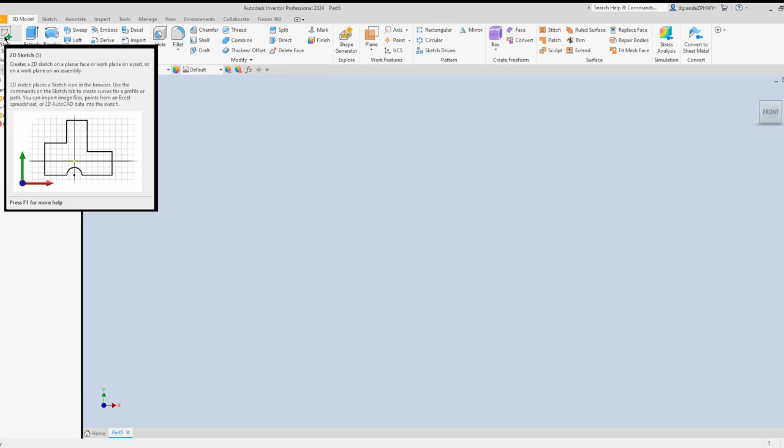So first thing we want to do is go to Tools and Document Settings, Units, and Millimeters, and hit OK. So we're in the metric system.

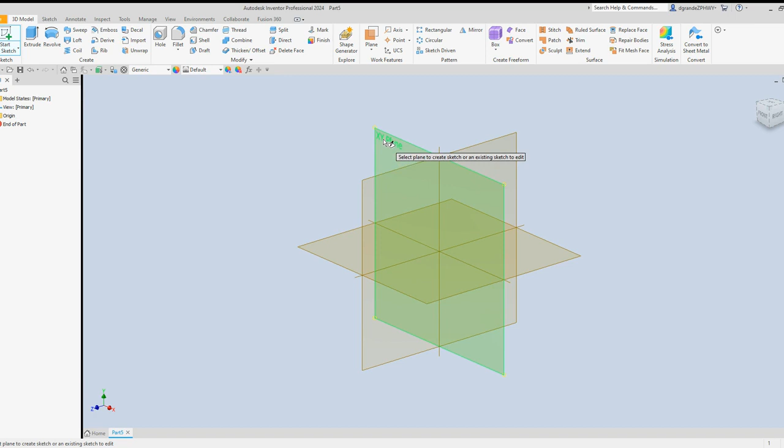Then we're going to go to our 3D model and start a 2D sketch. Now I'm going to go through this kind of quick because I don't want the video to be 90 minutes long. So if you get lost, I'm ahead of you. Just pause the video, go back. Probably best while you're working to have this playing on a Chromebook and off to the side while you're working on your computer at your workstation, if that's the setup you have. If you're one of my students, that is the setup you have.

So we're going to start this sketch on the XY plane. And I'm going to give you dimension numbers as an estimate. I don't want you to type these numbers in because I don't want you to constrain any of these numbers in the sketch. I'm just going to tell you about where they are. And as long as you're close, it should work out just fine.

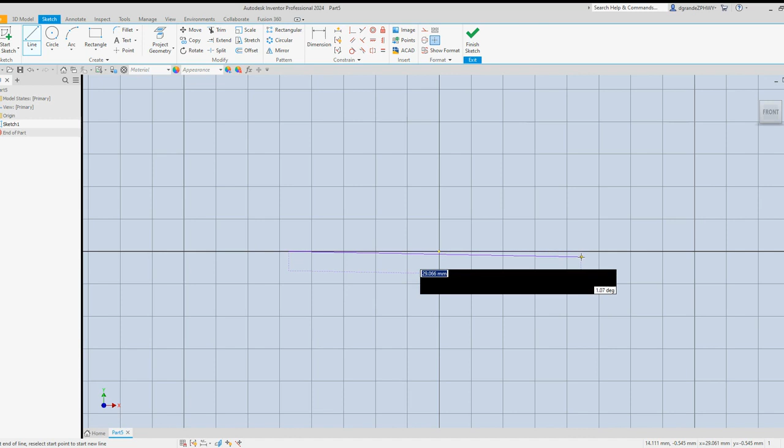So the first thing we're going to do is take the line tool, and we're going to start on the right here at about somewhere around 14, 15 millimeters. I'm at 14,950. And I'm just going to go straight across, about 30 millimeters across here. I think that's about what they were doing, 0 degrees, and hit OK.

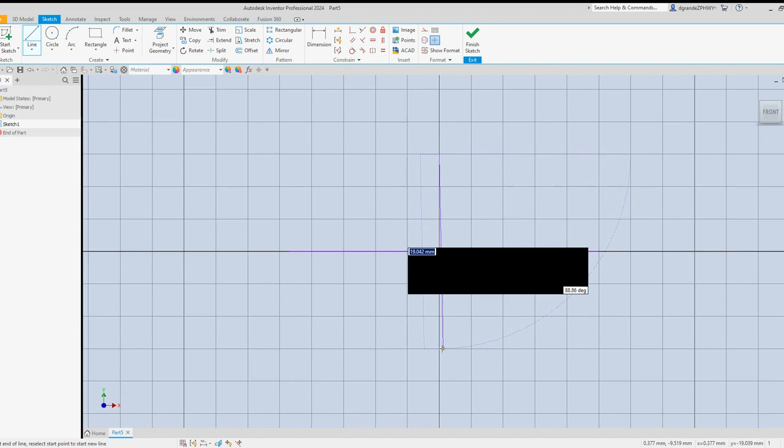And then I'm going to do a line down. I'm going to start up here at about 9.5. Let me get the line here. Yeah, somewhere right around here. I'm at 9.519 and come down about 19 millimeters. So I'm below the origin, right around there, and 0 degree or 90 degrees. So I'm right there. Okay, I'm going to hit OK.

Now I'm going to highlight, I'm going to left click and drag both of these lines, so I highlight them both. Then I'm going to right click and I'm going to select construction. So they're now dashed lines.

Okay, now that we have that, the next step was to create a circle right at the bottom of this line. Now, when we get done and we finish this sketch, we may have to go back in and edit the sketch and make sure the circle hasn't moved off this line. We kind of want it to be in line with the origin here, but let's just go ahead and start and make a circle at the bottom here.

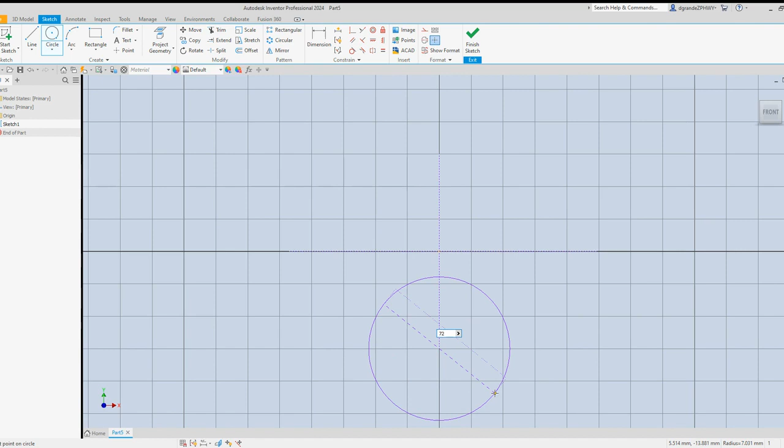And I think this circle was supposed to be 72. I think he did 79 and then redimensioned it to 72. So we're just going to go ahead and make it 72. And that's a really big circle.

Okay, now we're going to do dimension. And we're going to go from the center of the circle to the center to the origin here. So I'm just going to click the origin and click the center of the circle and drag that out and click on that, and we're going to set that to 44 millimeters. That's going to move it down.

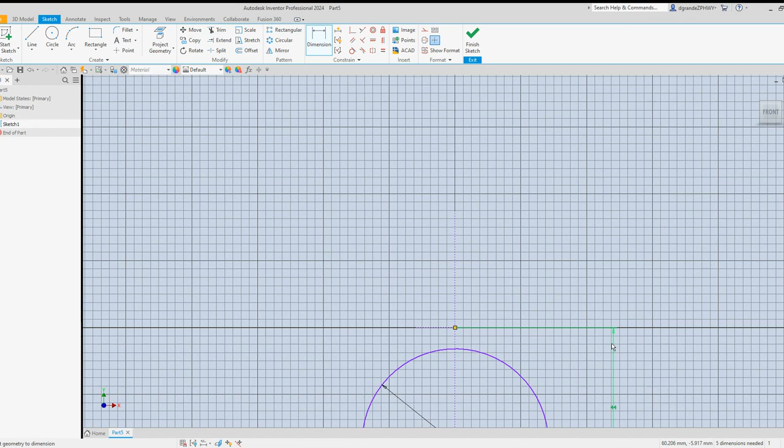Okay, now this next part was one of the confusing parts in the video. Again, I'm going to give you rough numbers to start with to make the arc, but don't dimension them in. Just kind of try and estimate it.

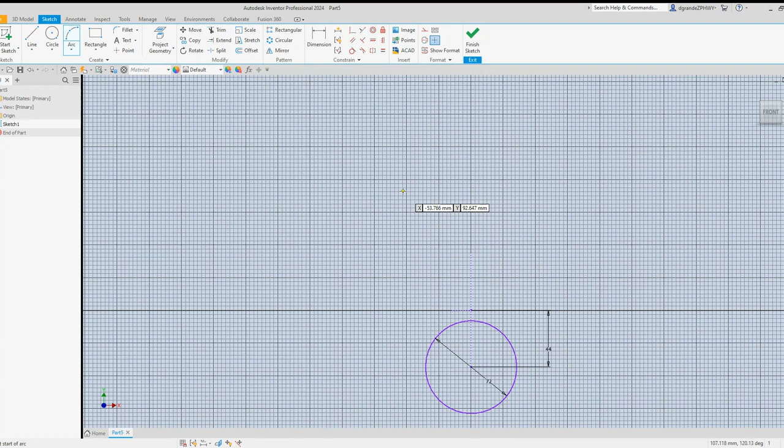So I'm going to click the arc tool. I'm going to come over on the left side in quadrant 2 here, if you're for you geometry fans, and we're going to go to about negative 52 left, and we were at about 92 above. It's about where they made that arc. So 52, anywhere right in there. So I'm at negative 52.436 and 92.

That's good. And then I'm going to go straight across and 0 degrees. Let's get that horizontal there.

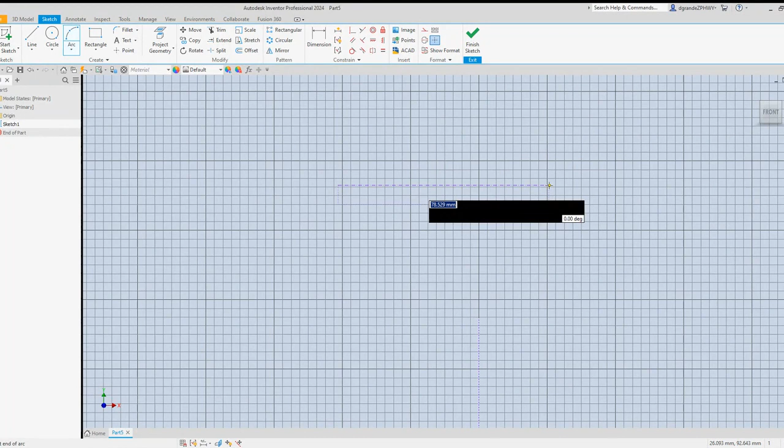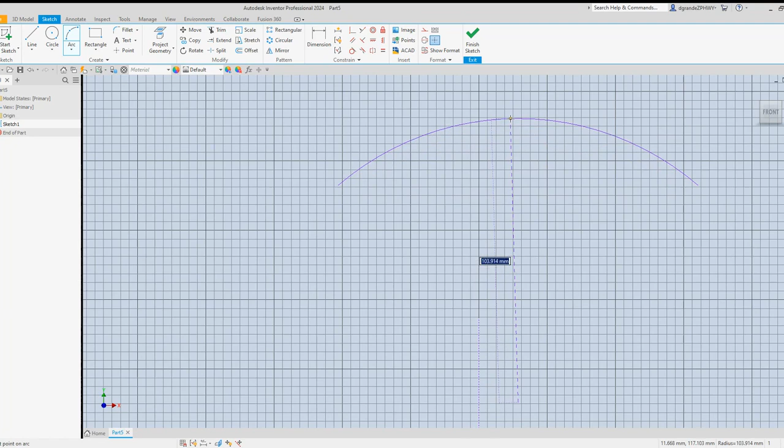0 degrees, and we're going to go right about 134 millimeters over. So get this over to about 134, yeah right around there, and again at 0 degrees. Just going to drag this down. There we go. Now for the height of the arc, we're going to do that to about 110, keep going up right around that point. That's good.

All right, now I'm going to zoom out a little bit. Now you're going to look at this and think, hey, that's not centered over that. That's fine, we're going to fix that with our constraint tools up here.

But first we need to make two lines: a line going from this point to this point, and a line going from this point to this point. Actually, before we do that, we're going to want to constrain those lines. So we're going to put a dot there and constrain that one, and constrain that one. We did that using the constraint tool.

Now we're going to do a line, and we're going to take a line to the circle, and another line to the circle, and hit OK. Now you're looking at it and you're like, wow, that's really messed up, that's not symmetrical at all. Not a problem, so we've constrained that.

We've made two lines. Now we're going to use the tangent feature. Click that, click this line and click the circle, then click this line and click the circle. That made them tangent, and put them in the right spots.

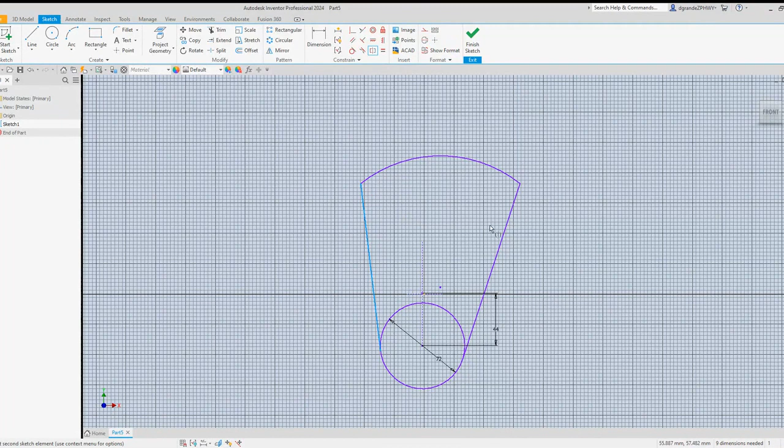Now we're going to try the symmetric tool. Click that, we're going to click the left line, then we're going to click the right line, then we're going to click the center construction line right there. Boom, and that's going to center that.

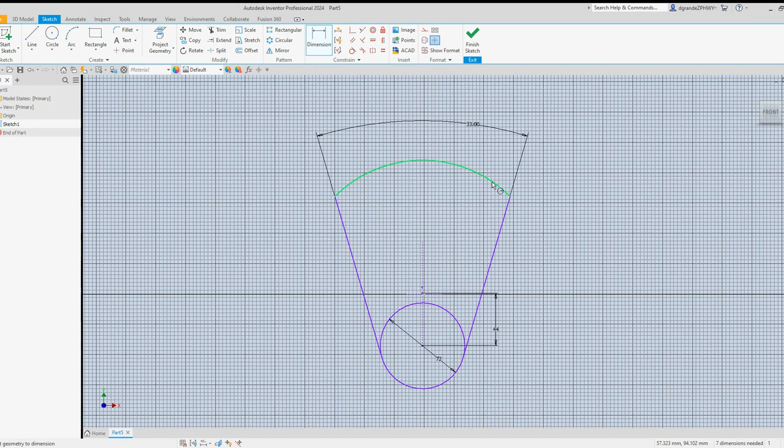And now we're going to dimension. We're going to click the left and then the right, and then we're going to come up and change that to 33. We're going to highlight it first - 33 degrees. Then, while we're still in the dimension tool, we're going to click on the arc here, click and drag down to the left, and we're going to set that to 80 millimeters.

Now we look at that, we come down real close here, we see our construction line - our origin is not right on that line, below the origin of the sketch area. So I think the best way to handle that is we're going to finish the sketch like that, and then come back in and edit the sketch.

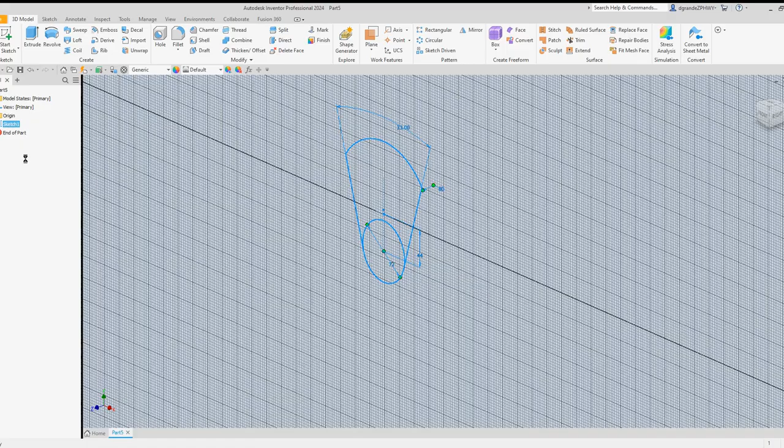I'm going to zoom in, and I'm just going to grab that point with the left click and move it right over and put it right there in the middle. And then finish again. Now that should be pretty centered, so when we start mirroring things and rotating things, they should all line up appropriately.

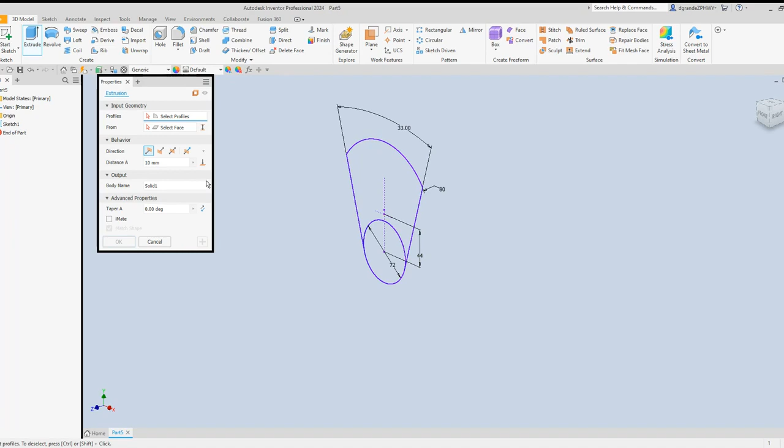Now we're going to extrude this, and we're going to set our extrusion to 15 millimeters. We're going to extrude both parts of this and hit OK. All right, that's the first piece we've made there.

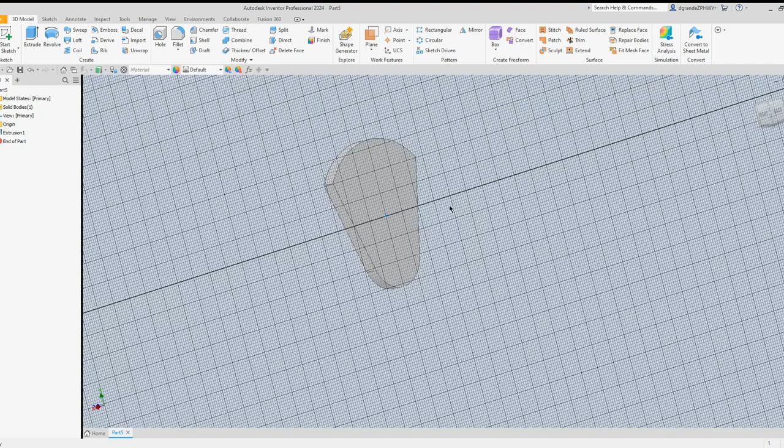Now we're going to come along the back side. There's the back, we're going to click there and do a new sketch. We want to put a circle down here that's in the middle of the arc of this circle. So what we do is we hit the circle tool and just kind of touch the bottom of this - we don't even have to click a button, we just move the mouse up and that dot appears. So then we're going to click on that dot, and we're going to put a circle in that is going to be 54 millimeters. Enter. Finish.

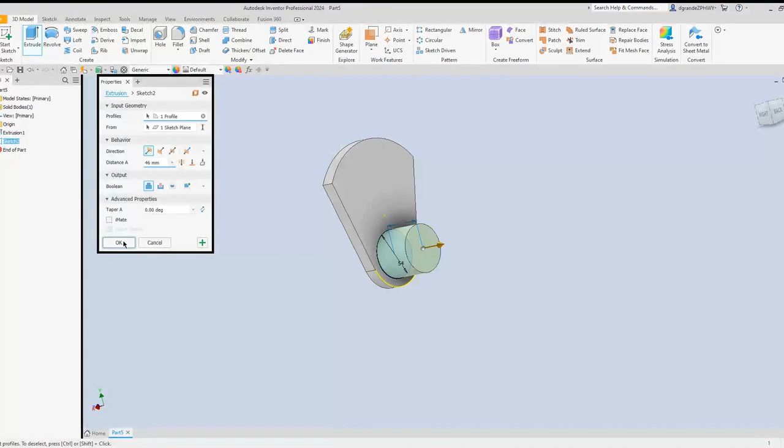Extrude, and this extrusion is going to be 46 millimeters. All right, hit OK. Now we're going to go back to the front.

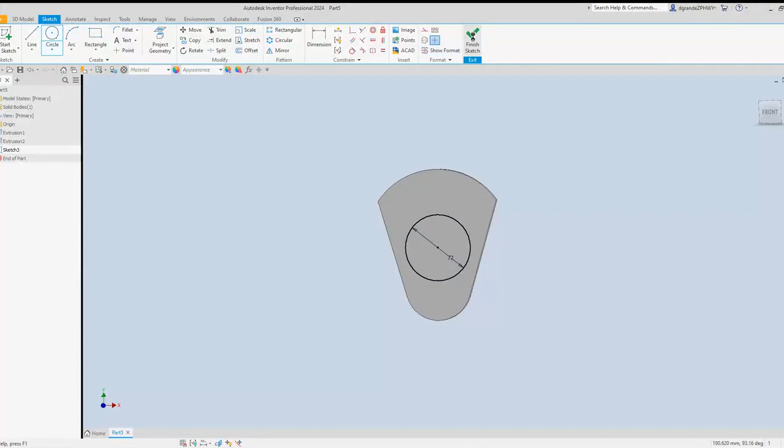Click here, create a sketch. We're going to put a circle right there, circle right on the origin, and that circle is going to be 72 millimeters. Finish. Extrude, and this extrusion will be 38. Enter. Okay, now we've got the basic piece that we're going to be duplicating and mirroring actually to create the crankshaft.

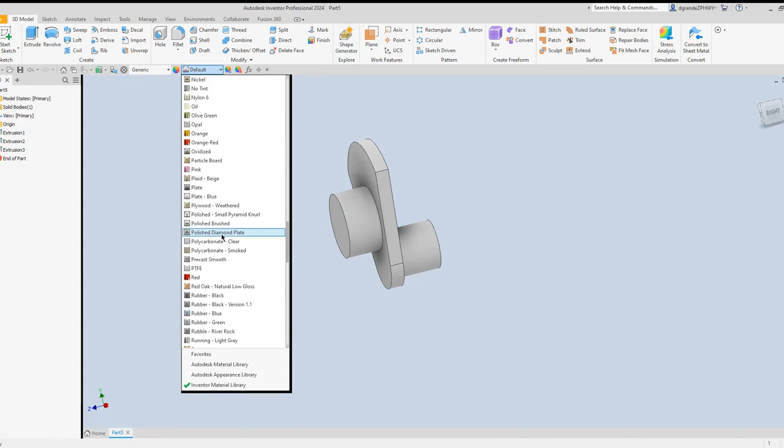So now's a good time to go into our material and color it. Yours may be below the ribbon, yours may be above the ribbon - some people have it down below. I have mine right here, so I'm just going to go to steel, and let's see, steel polished. There we go, now it's got a nice polished steel look to it.

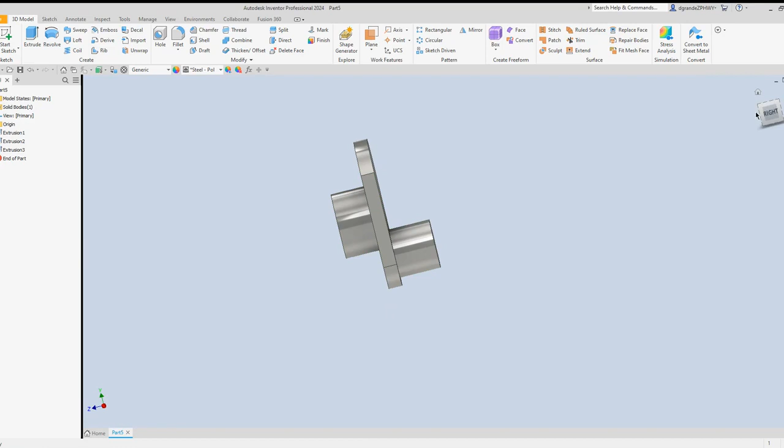Okay, now we want to mirror this, flip onto this side, so it's exactly the same. And we want it to mirror at the midpoint of this piece. So what we're going to do is move this around a little bit, and we're going to use the plane tool here. We're going to pull it down, and we're going to pick mid plane between two planes.

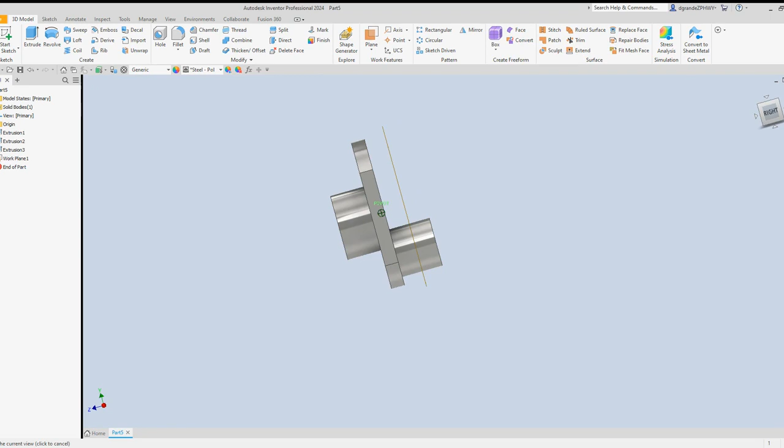Click that, then we're going to click the face of this one and the face of this one, and it gives us a plane right in the middle. This is exactly what we want. Now we're going to hit mirror.

We want extrusion 1. Set features again, extrusion 1 and extrusion 3. We want to extrude those two things, and we want to mirror those two things onto the other side.

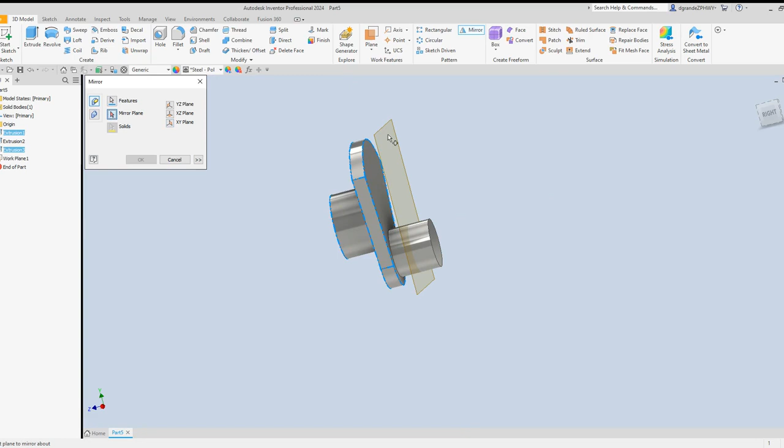So we're going to pick our plane, and that's the plane right there. Now you can see it gives you this ghost outline, and that looks right, so we're going to hit OK. And bloop, there we go. Duplicated it. Now we've got a bigger piece.

Now we could take this plane here. We don't need this one anymore, and we can just right click on it and select visibility off.

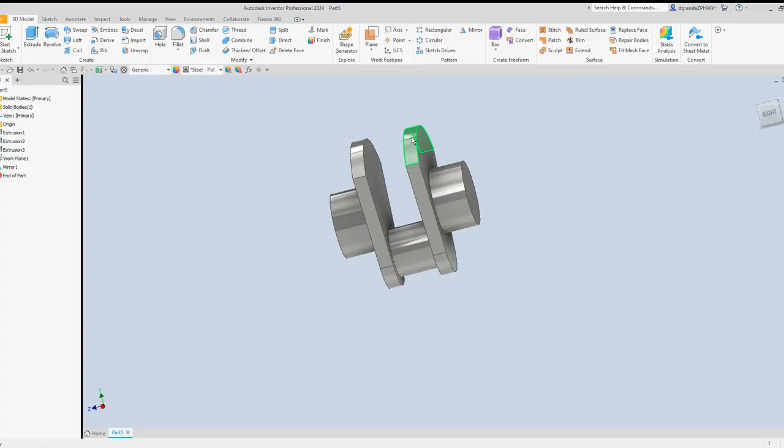Now we are going to do the plane thing again because we want to duplicate this whole thing and mirror it over here. We want it to be halfway on this piece. So I'm just going to drag this over a little bit so we can see it and pick mid plane between two planes, that plane and that plane. So we got that there.

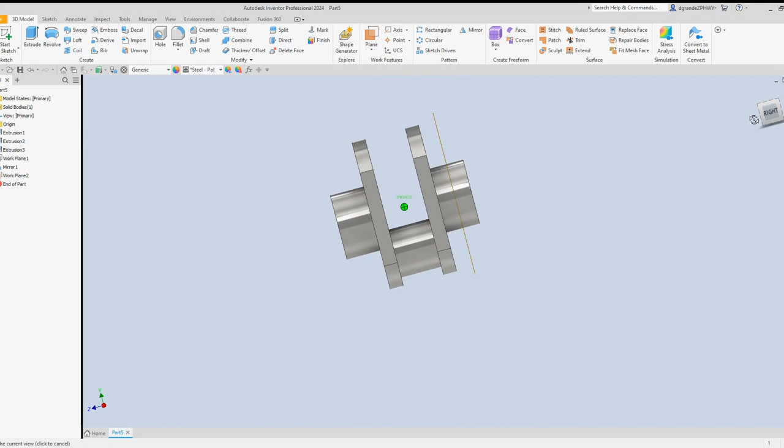And we're going to hit the mirror tool. This time we're going to hit this button here, mirror solids. And we're going to pick our plane right there. There's our ghost outline. That looks right, we're going to hit OK. Bloop, now it's duplicated. Then they had you right click and turn that plane off again, visibility.

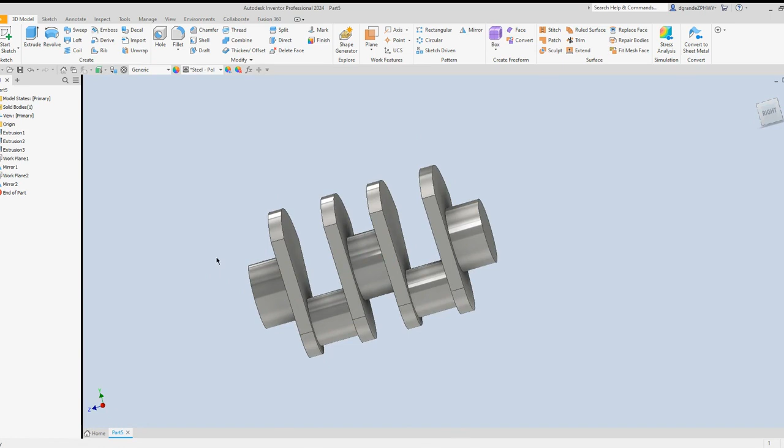I'm just going to drag this down a little bit. Now, magically in the video, he just had another plane appear here. Some people in one of the classes, may have been Red 2, figured out a way that this worked. I was behind them because I was grading those other projects, and then I was on the piston while people were on the crankshaft. So here's my solution to get this to work.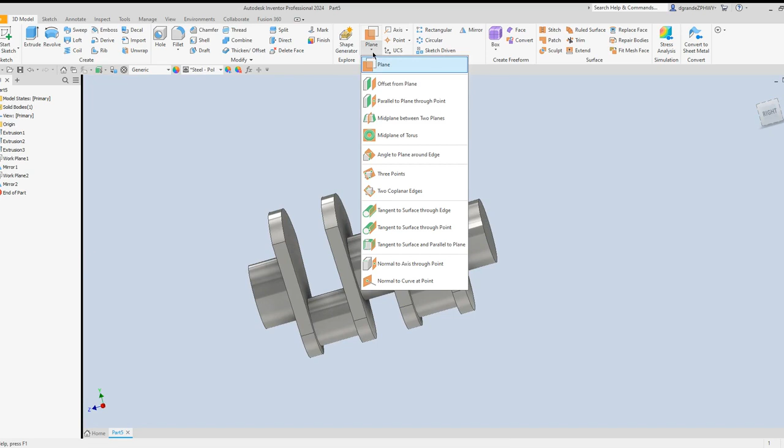We're going to do the mid plane again, mid plane between two planes. We're going to select this plane and the other side, that one, right? So we got a plane right in the middle.

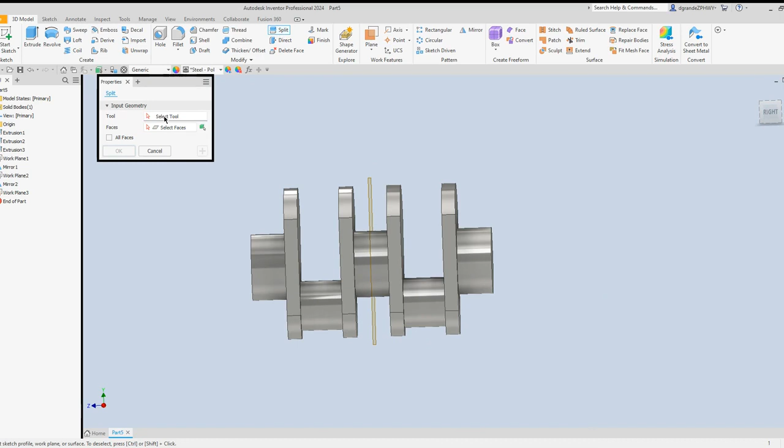And then we're going to do the split tool. We're going to select the mid plane for our split, and then we're going to select the entire object there. We're going to hit OK. So now we should have a split right in the middle of this.

And if I turn this off, visibility to off, okay, so I've got a split line in there.

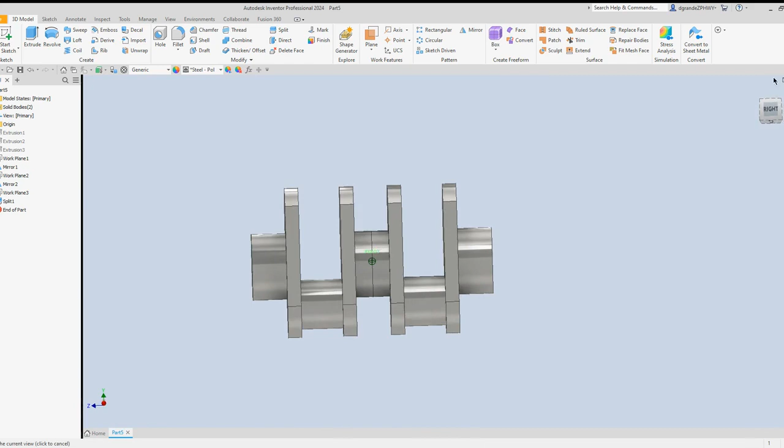Now, we're going to go to modify. We're going to drag that down and we're going to move bodies. And when I click the bodies, if I click on the right side, it should, yeah, just let me select that one. We're going to take the third choice here, rotate about line.

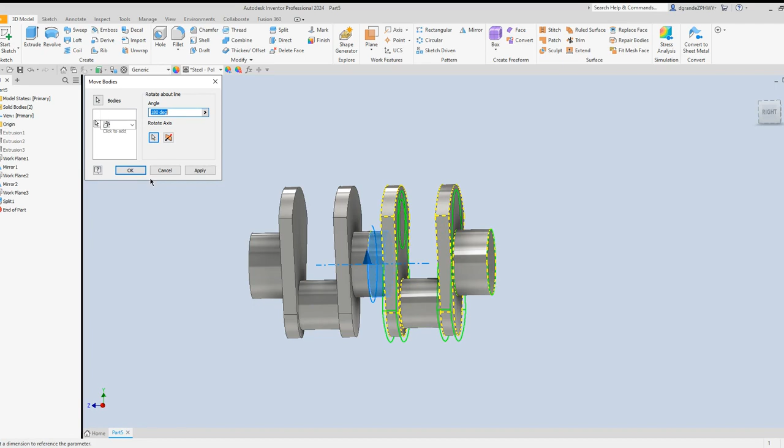And we're going to rotate this 180 degrees. We're going to select for the rotation axis this middle point, and it should flip it upside down. Please, please, please, please, please, please. Yes, okay. So, but it's still two separate pieces, and we would really like it to be one piece.

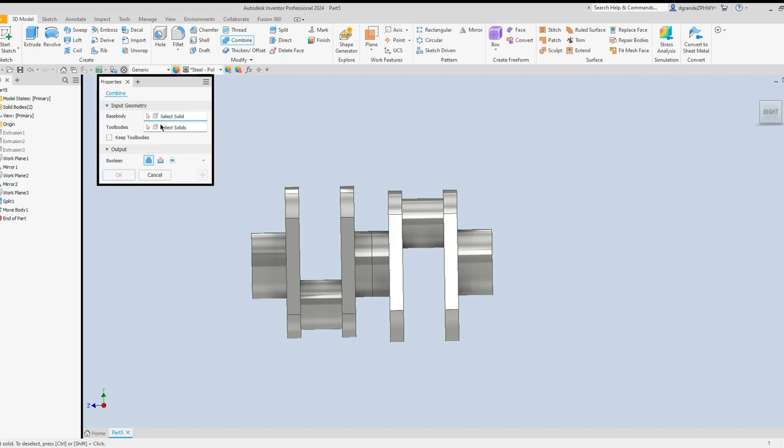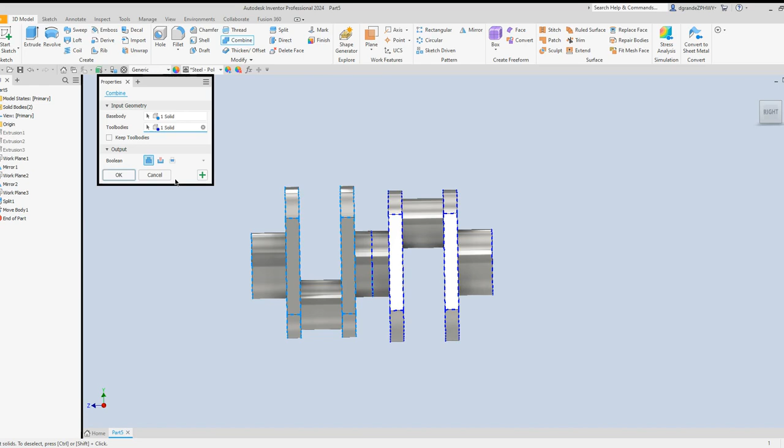So we're going to do combine, and we're going to select our solids here. Let's see here. Select them both. And we're going to join them. Oh, wait, hang on. I think we have to be select solid, select that one, select solid, select that one. And then OK. Now it's back to one piece again.

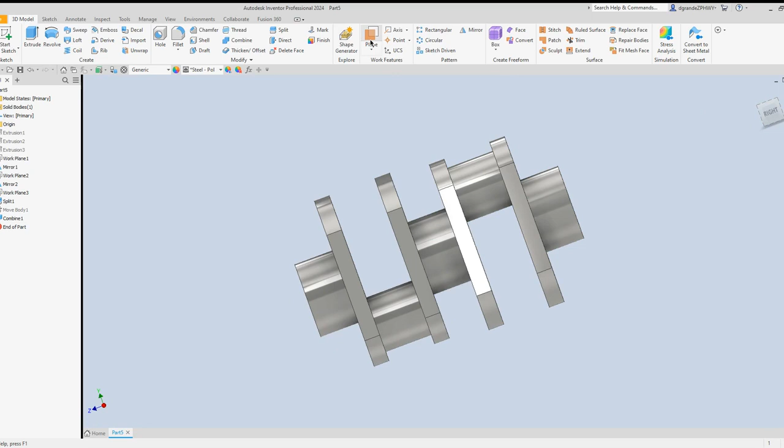There we go. And now, guess what? You guessed it right, we are going to mirror this again. So we're going to mirror it in the midpoint of this piece. We're going to have to do mid plane between two planes and pick that plane and that plane, so we got a plane right there. Mirror all solids. Mirror plane right there. There's our outline, and hit OK.

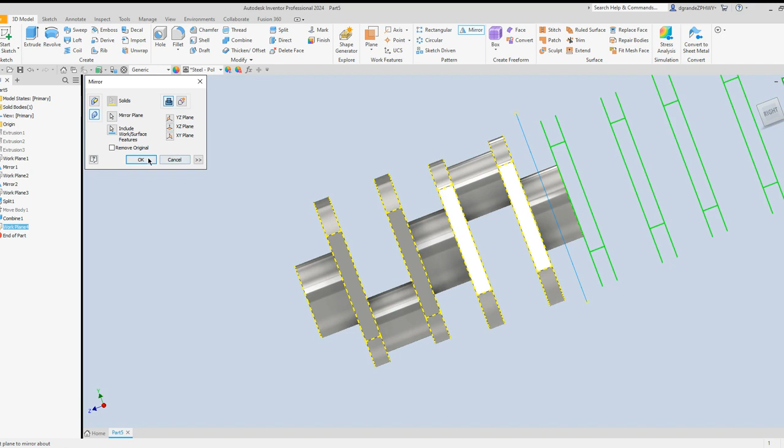I'm going to just drag this out here, and look at that. We've got down, up, and down. That's how our crankshaft is basically set up for our 4-cylinder engine.

Thank goodness it's only 4 cylinders, otherwise we'd have to keep doing this. I think in the old days, there was a car called a Hudson. I think it had a straight 10 or something, or straight 8, had some really long engine. Must have had this incredibly long crankshaft with all these different lobes up and down and all that.

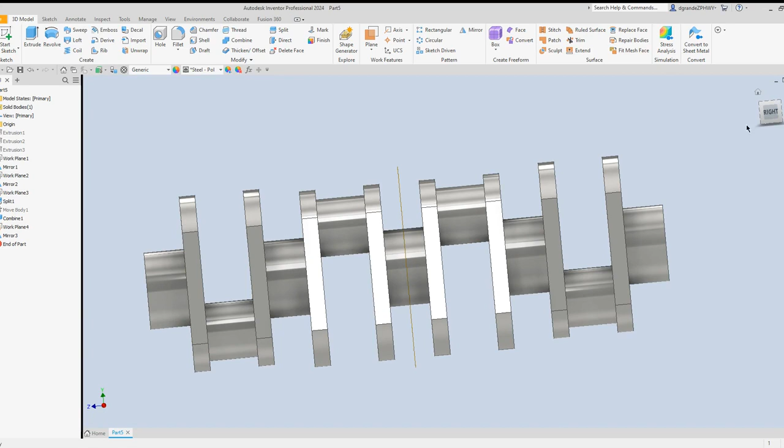So, but we're doing a 4, so that looks pretty good. We rotated that, we've joined it. We're going to turn our plane off now because we don't need that one anymore. So we're going to right click there, visibility.

Okay, now the fun parts. So we're going to go to, I believe we were going to go on the left side here. Let me just go back to home to see what this looks like. Yep, and we're going to create a sketch here.

And we're going to put a circle right at the origin here. This circle is going to be 35 millimeters. Enter. Finish.

Extrude. And this extrusion is going to be 80 millimeters.

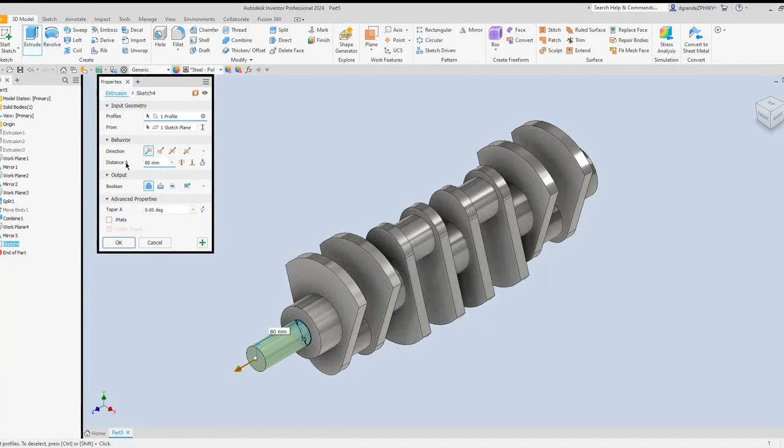Okay, and we're going to go to the other side. This side got a little tricky. Go to this side, create a sketch. Now we're going to actually make 2 circles on this one. So we're going to make 2 circles here.

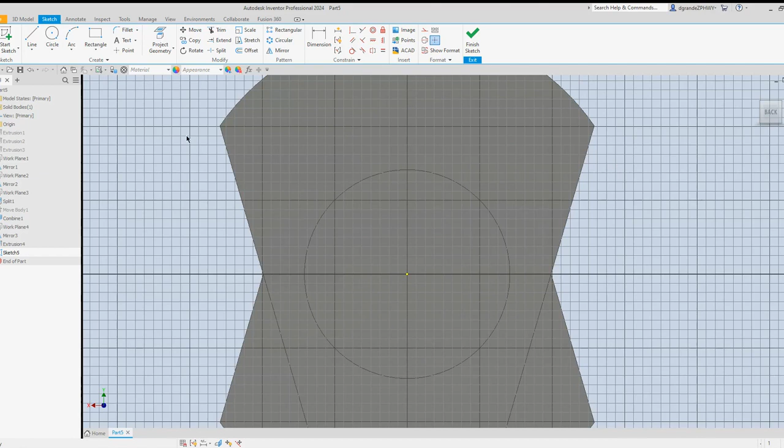Circle tool. The first circle is 144, it's big. The second circle is 110. And what we're going to do, we're going to hit OK.

We are going to right click the inner circle. First we'll left click it. No, we're going to right click it. And we are going to construct it. Hang on, how do we get out of this? There we go, right click, construction. So that's now a dotted line.

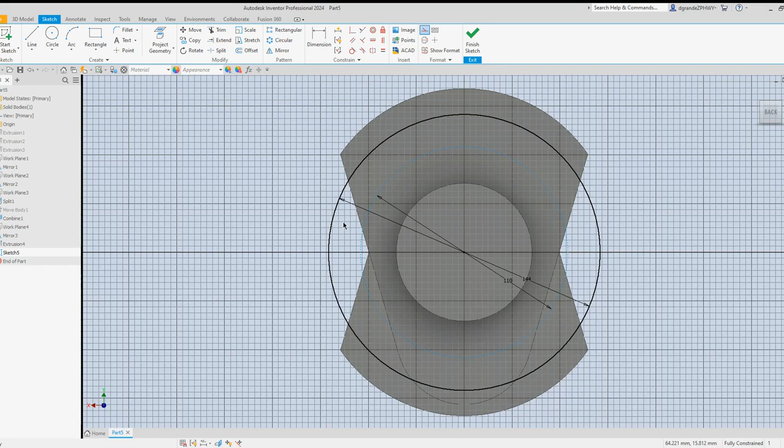Okay, now we need to make a circle on top of the construction here, right at the very top. Let me just zoom in on this a little bit. So we're going to put a circle right there. In the original video, he did 5 and then changed it to 10. So we're just going to go right to 10 and hit enter. Now we've got a 10 millimeter circle.

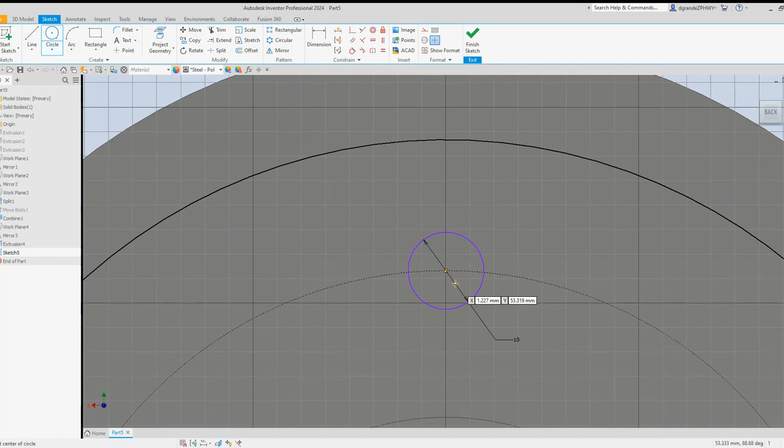Now we're going to duplicate this all the way around. We're going to have 8 of these. So we're going to use the circular tool, and we're going to do that for axis. We're going to select the construction line.

We're going to change it to 8 circles that we want to have. And then for geometry, we want to click the circle. And if we hit OK, oh please, oh please, oh please, it should duplicate this and have 8 of them going around. Yes, okay, perfect.

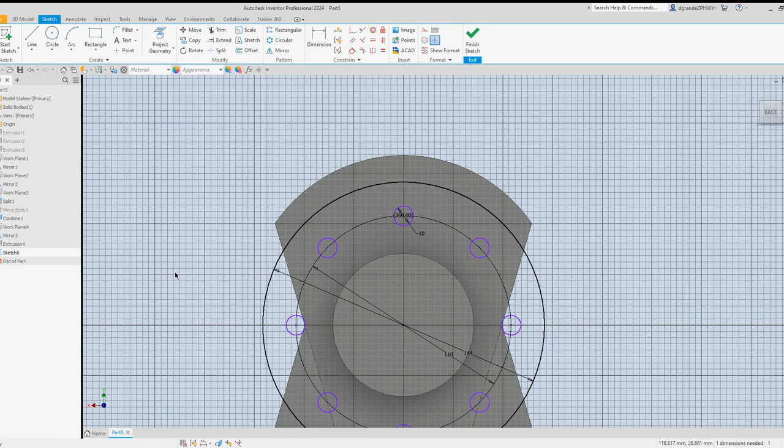It worked for me anyway. If it didn't work for you, escape and Control Z and do it again. All right, so we've got that, and so we're ready, I think.

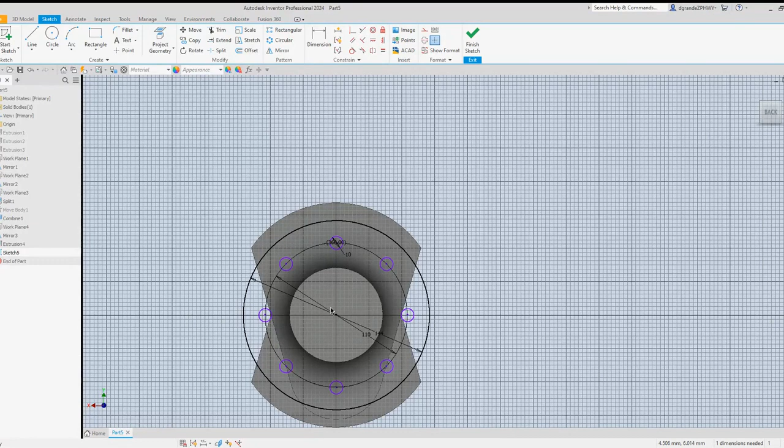Can we extrude this now? Yeah, I think we can finish. Extrude. Set this to 15 millimeters. And hit OK.

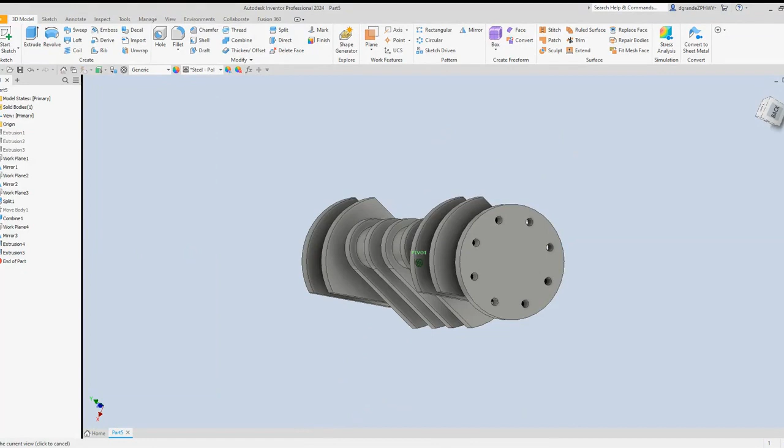And then let's just take a look at it. Oh yeah, that's looking really good. Hit the home button. Yeah, so we got that in.

Now I think what we want to do, the last thing he had us do was hit the fillet button and set our fillet edges to 3. And this was kind of weird, he hit this button out here, the all edges of selected solids. So if I click that, everything gets selected and we'll fillet everything 3 millimeters.

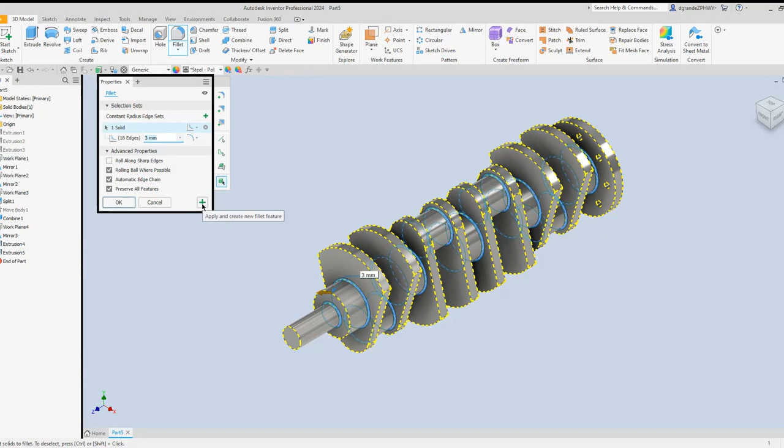Then he removed this one that said 18 edges, took that one out, then hit apply and create new fillet feature to go to just the circular ones, I think. So when you hit the plus, these ones are the ones that are highlighted, the end and where all these circular features are, and hit OK.

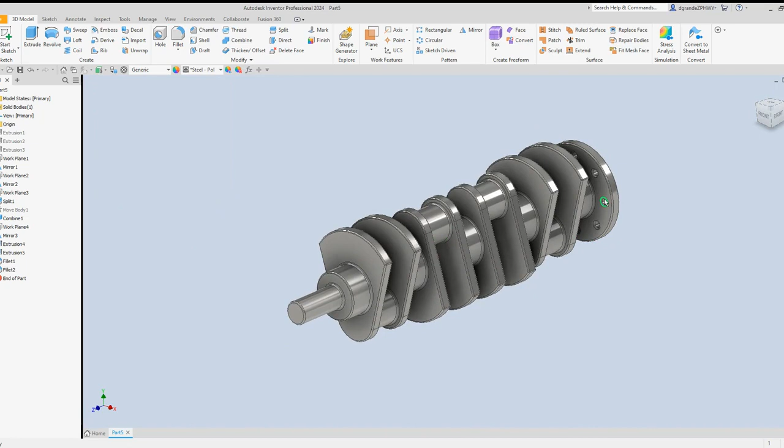Let's hit OK. And please, oh please, yes. Yeah, that looks pretty good. So all these holes have the little fillet in them, all these edges here, these bearings in the middle where those pieces are, they all have the 3 millimeter fillet.

And I believe that is it, that is how you make the crankshaft. And if you want to know why the middle two are up and the outer two are down, why 2 pistons would be fully up and 2 pistons would be fully down, I'll explain that in class at a later date, and explain how these engines work, gasoline engines.

So you want to do a file save as, and save this in a folder specifically for this project. Now, I didn't do the piston yet, but if I had done the piston first, maybe I'll do the piston video next, just in case anybody's farther behind and needs the video on how to do the piston. When you're going to assemble this at the end, you want to have all your project files in one folder for the assembly to work right.

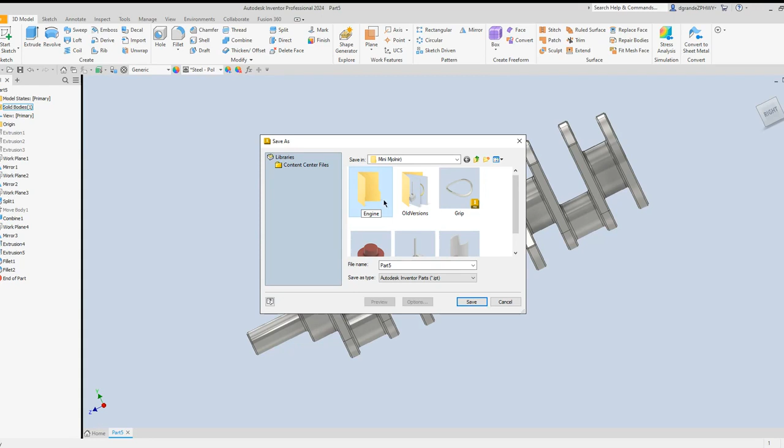So we'll just make a new folder if you haven't done so already. Call it engine, and we're going to double click on that, and we're now in that engine folder, and we'll call that the crankshaft, and save it.

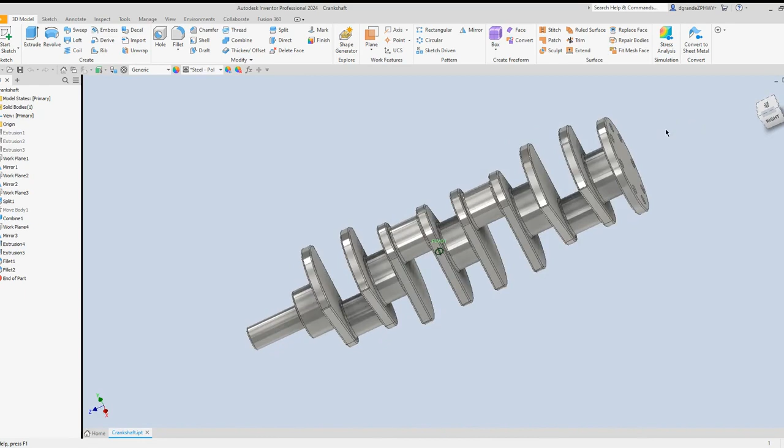And hopefully that worked for you, and we can move on to the next part. If you have to do the piston, do the piston. If you've done the piston and the crankshaft, the next part is the connecting rod. Okay, hope this helped.